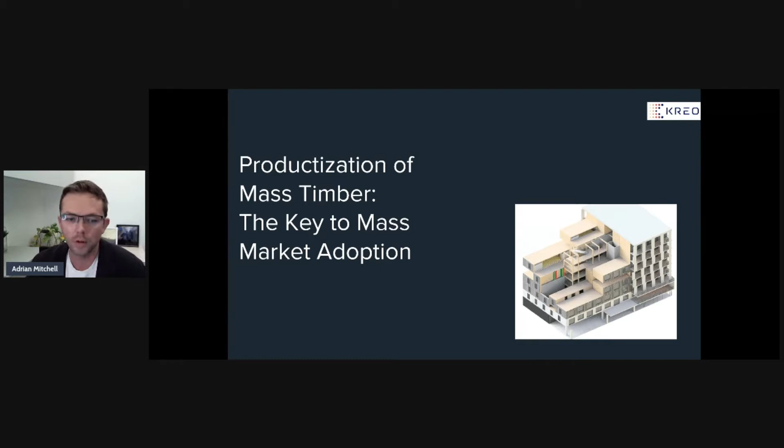So the question that I'd like to ask is, well, why haven't buildings become productized in general? We know that there are limited niche markets where we have seen substantial growth in productization, specifically the modular construction market or volumetric modular. But there's still a lot of ground to cover on the timber side of things. That being said, we're making progress.

One thing we can look at outside the construction industry is the productization that we've achieved in various other sectors, including things like vehicles and airplanes and electronics. They're all designed on modular platforms with standardized components. The big exception here is that, of all these big ticket items that we trust and that are highly evolved, we're still taking a very simple and non-productized approach in the way we develop and design most of our buildings.

So in order to understand what I believe to be some of the root factors inhibiting productization, we should focus first, I think, on where construction projects start, and that's in design. So in order to address some of the significant factors impeding adoption of productization and off-site construction methods, let's take a high-level look at how the traditional construction development industry conceives projects.

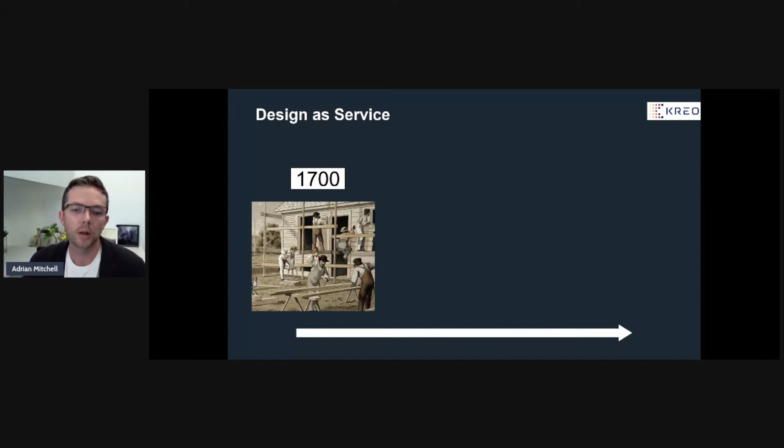So the design as a service model is a typical approach that the construction industry and development industry uses to develop a project. But it has not delivered the kind of innovation we've benefited from in other sectors. So it's true that we've seen a noteworthy uptick in prefab methods, but it still on average represents less than 10% of the market here in Canada and in the United States as well.

And despite substantial advantages to construction speed, quality control, and cost, the vast majority of construction is accomplished via traditional site-built framing or structural site-built methods. And this is especially true in the housing sector, where we're desperate for improvements in productivity.

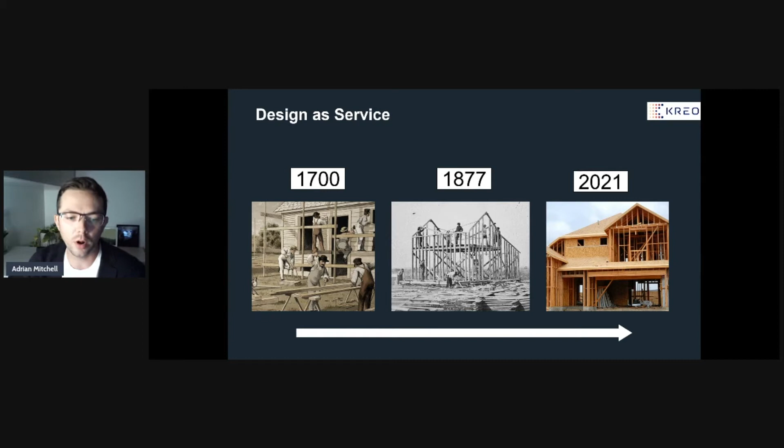So what's design as a product? So design as a product has unlocked the power of incremental improvement. As we can see outside of the construction industry, numerous generations of revolutionary improvement in this regard

have been applied to everything from automobiles, cell phones, computers, and it begs the question: what would design as a product look like if we'd applied it to architecture and construction and development in 1909, like Henry Ford did it to automobiles? What would our building systems and processes look like today if we'd evolved them over the last 150 years?

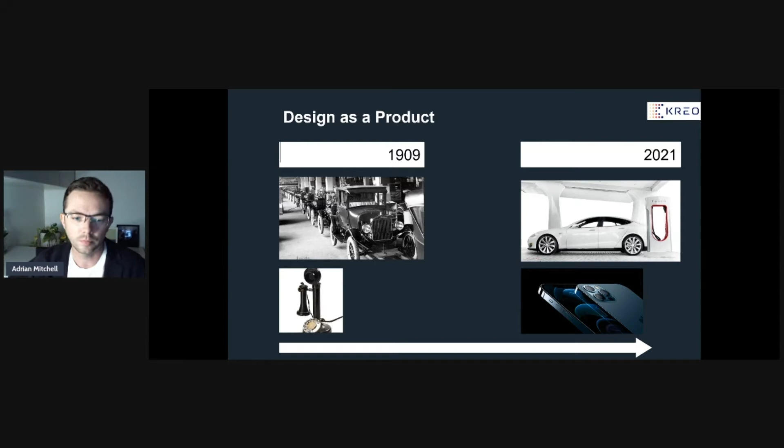So what I believe, based on my experience, is holding us back from mass adoption is the fact that we're treating too many projects as one-offs. And this revolves around the idea, I believe, of architecture and engineering as a service. So traditional conceptual design is about architecture as a one-off service. The opportunity for promoting mass adoption of modern construction methods starts at the product conceptual design stage.

It's really difficult to take an engineered system or kit of parts and apply it, after the fact, to a conceptual design that wasn't conceived around that kit of parts and its limitations and opportunities. So I believe the biggest opportunity here for us to advance productization and mass timber is really rooted in the way we conceive projects and treat them as one-offs. So architecture as a service generally follows three core steps.

And the problem is that traditional conceptual design leaves structural engineering too late in the process for productization to be effective. So what we want to do is consider engineering limitations in the kit of parts before we start conceiving our design or our massing and schematic. Because if we don't, we end up with a project that is more conducive to traditional methods.

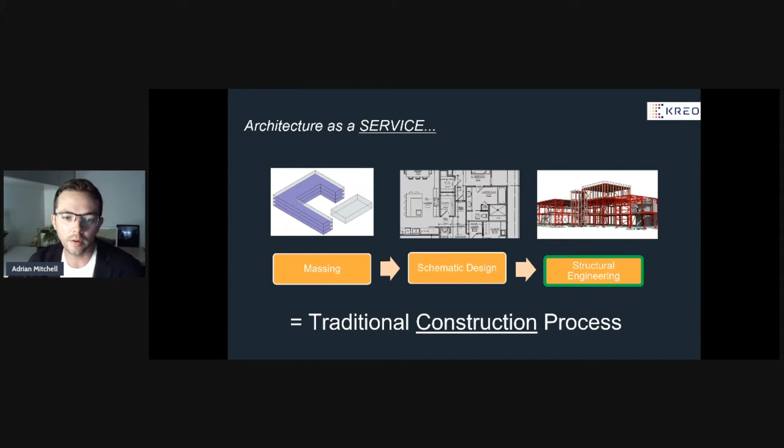And I lived this problem when I was doing prefabricated systems at both Bone Structure and Horizon North. All too often, I would have potential clients and developers coming to me with developed schematic designs, and they were already too far down the design path. They hadn't been designed with a kit of parts in mind, and we were tasked with an impossible process of trying to apply our system to a pre-designed scheme. And more than 99% of the time, those projects didn't move forward. So we need to take a look at how we conceive projects if we want to push forward.

So why is mass timber so compatible with productization? Because I think this is the key to the presentation: why, unlike traditional materials and methods, should mass timber embrace productization in order to achieve scale. So architecture and design as a product is about creating a versatile kit of parts and pre-engineered systems. And these systems should be versatile enough that they can be used on more than one project.

Does that mean these systems can't evolve and improve over time? No, but they should have enough flexibility that they can be used on a variety of projects for that building type. And the way we get there is the architect, working in advance with an engineer and manufacturing partner, develops a reusable library or kit of parts, which includes structural components, for example, mass timber, LVL or glulam beams, CLT panels for floors and shear walls and cores. And then once these components have been engineered, designed and thoughtfully put together, they can be used again on future projects, creating new efficiencies and also helping manufacturers create consistent and stable demand for materials.

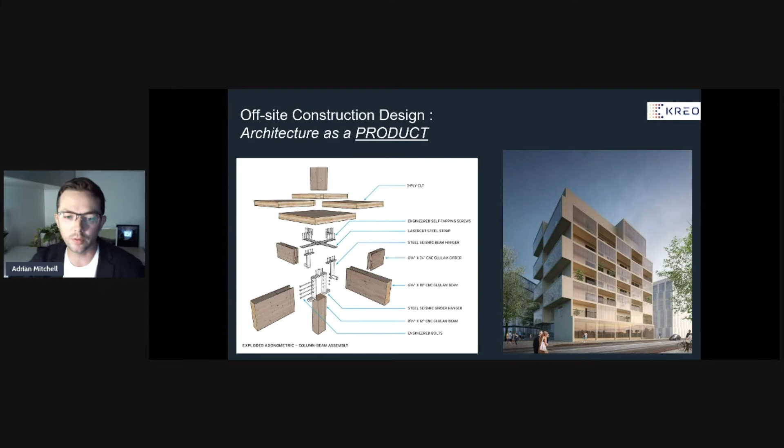So why is mass timber so ideal? Well, it's ideal because it's a highly value-added material versus stick lumber.

So this makes it ideal for productization, because if we use mass timber, we use these highly value-added materials with a traditional construction method, well, it's not very feasible. I mean, traditional methods have resulted in landfills being 50 to 60% full of construction waste. And if we're paying a lot more for our material, it's not feasible to have that kind of waste. So we're adding a lot of value.

We're preparing our material in the mass timber factories, to spec by the architects and the engineers. Those factories are producing those standard components, and instead of preparing and cutting those components on a job site and then installing them, we're really just focused on installing them on the job site, which has substantial impacts on speed of construction.

So also, we need to consider that mass timber is a highly value-added product that's produced in limited dimensions. So if we don't consider our supply chains, opportunities, limitations and strengths in the pre-con and in the conceptual design phase, we may be unknowingly, as architects and engineers, driving up costs unnecessarily by perhaps creating a one-bedroom apartment that's 6 inches too wide for the maximum size of a CLT panel, for example.

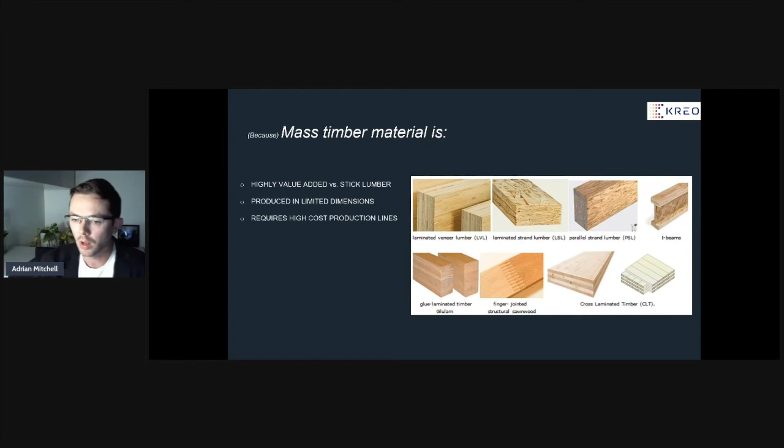So I'll move forward. So what does this look like? What does a workflow look like in architecture and design as a product versus architecture as a service and a one-off? Let's give you a sneak peek as to how we address this at Kreo software. But first, I'll share our vision at Kreo. What we believe here at Kreo is that we think differently about how the industry should conceive new projects. And this is because the status quo simply is not conducive to rapid adoption of productized building components like mass timber, modular, and offsite construction.

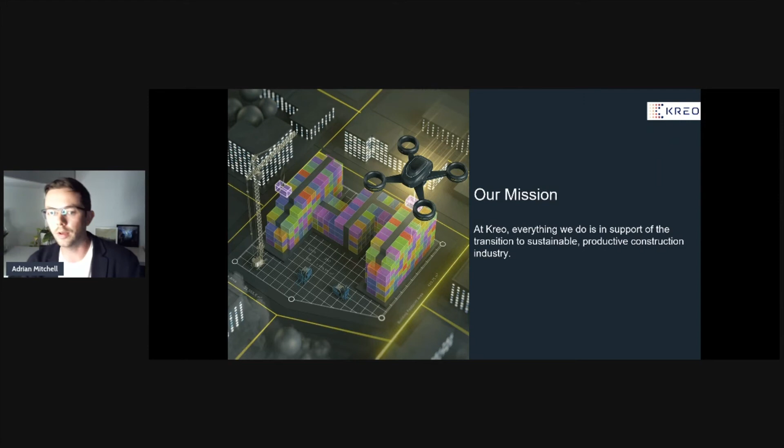So we believe that in order to achieve rapid adoption, we must address the way we design at the early stages, the conceptual design stages, and that the way we challenge the status quo is by making our design tools practical and easy to use. I, for example, am not an advanced BIM or Revit user, but surely you'll see how I can effectively conceptualize, at a pretty high level of detail, a mass timber project in a matter of minutes, and be able to test that project against other concepts or ideas that I might have, and get measurements using real BIM data against that result.

Before I jump into a quick workflow example and demo for you guys, I'll explain a little at a high level how we develop our system and how we articulate data. So on my screen here, you'll see a few things. When we work with a mass timber or modular client to embed their system and kit of parts onto our software platform, we start by breaking down their system by primary and secondary load members specifically.

So if it's a mass timber building, it may have columns that are glulam or LVL columns. It may have beams, glulam and LVL, and it may have CLT walls, CLT floors. And so that's what we can see here, breaking down the components.

And in doing that, we're taking a look at how those components can be used and what are the rules that need to be applied to those components so that we drop it into our AI-assisted design tool. We're not designing something that the engineers can't put their stamp on or can't approve. We're designing around the limitations of the system and each kit and each item in the kit of parts.

So we can see here that we're considering spans, we're considering loads, and we're also considering things like core configuration. And on this specific example, we were considering MEP and HVAC access to each floor back to the core. So every project is different. Kreo is not engineering and designing kit of parts. What Kreo does is we articulate productized systems like mass timber and modular.

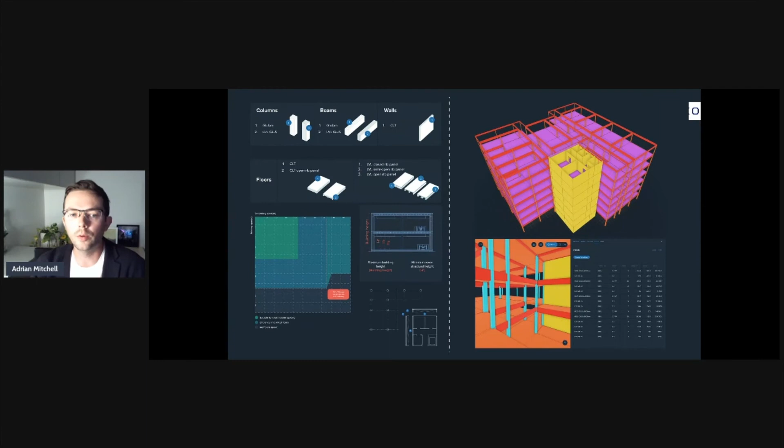So this is a quick window as to kind of the work we do with our clients in advance before a system is up and running on our platform. Essentially, we digitize kits of parts, and we take our clients' Revit or SolidWorks BIM objects, articulate those, and that can be for almost any building type. It could be for low-rise apartments, it could be for office buildings, it could be for student housing, anything that the architect, engineer, developer wants to use a kit of parts for.

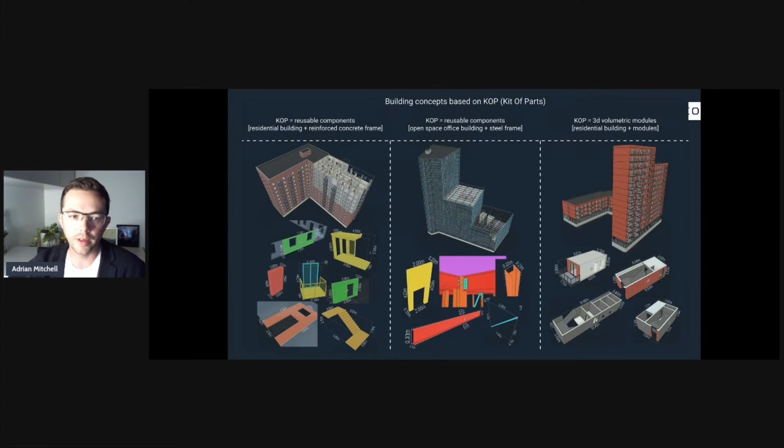We can articulate it and work with our clients to follow the rules around that kit of parts and make sure that they're expressed accurately on our platform. So the demonstration that I'll run through with you today is an example of a pilot project we did with a company called Stora Enso. Stora Enso is one of the largest producers of mass timber in the world, based in Europe.

And recently they observed some of the work we've been doing with an off-the-shelf product we have called Kreo Modular, which is a volumetric conceptual design tool. And they wanted to apply it to their mass timber kit of parts for office buildings specifically. So Kreo agreed to produce a proof of concept for them, and today I'd like to just give you an idea what that looks like.

Now, keep in mind, this is just a pilot project that we did. It's in process for potential future development, but it does give you a good understanding as to how Kreo can articulate productized mass timber kits of parts, and also what a workflow would look like for an architect, engineer, or developer trying to rapidly conceptualize productized systems. So I'll jump into that now.

So here we're on the dashboard for Kreo Design, and within Kreo Design, I've got the ability to access the Stora Enso pilot project. So I'll start by clicking the new project button. Call this the CanBIM project. And the project we'll be demonstrating today will be for a commercial office.

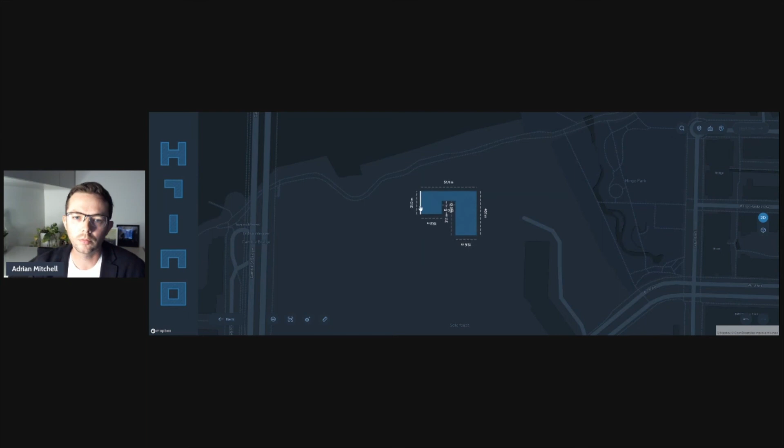Zoom in on it a bit, and I can reposition this on my site and maybe even change some of the dimensions for my building footprint. I want to make sure I maximize the nice view of False Creek as well as some of the south-facing natural light. So I've repositioned the massing here. Once I'm happy with that, I can proceed to the next step, and Kreo will begin to calculate potential solutions.

So the next phase is to choose the platform that represents what we think is the best circulation solution. What's interesting about the circulation solution here is it's also the HVAC and MEP solution. So we can see the light gray area is not only how people will access all sides of each floor of the office, but it's also where our MEP system is going to sit.

And this is important because the algorithm will actually design a structural solution that allows the MEP system to not be interfered by any structural components and provide direct access to the core. So generally what I try to do is I look at the one that has the optimal circulation area and the best, most direct path. And although this one has a low circulation area, I'm not too keen on the MEP complexity, so I'm going to choose this one.

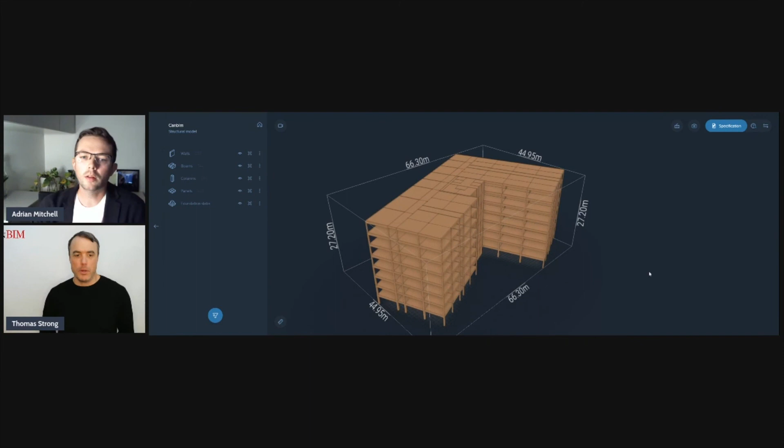So that's right. What do you think needs to be done to enable that in the market? Do we, as an industry, need to come together and agree on what that kit of parts should be? Or how do we even start this conversation with all the manufacturers and all the designers to say, hey, let's standardize on this? I guess there must have been some sort of similar movement when we decided on what a 2x4 was and a 2x6 was at some point, right?

Yeah, it's a great question. If I was a manufacturer, I would think there's a great opportunity for me to really take an initiative in that regard, and knowing the limitations and strengths of what I can produce better than anyone else, to really put a kit of parts together for the building types that we know there's a significant demand for, and really market that to the people designing these buildings, which are the architects, and feed them the ideal kit of parts that's going to drive down costs and increase production efficiencies without having too much of a detrimental effect on the architect's ability to do their job, right?

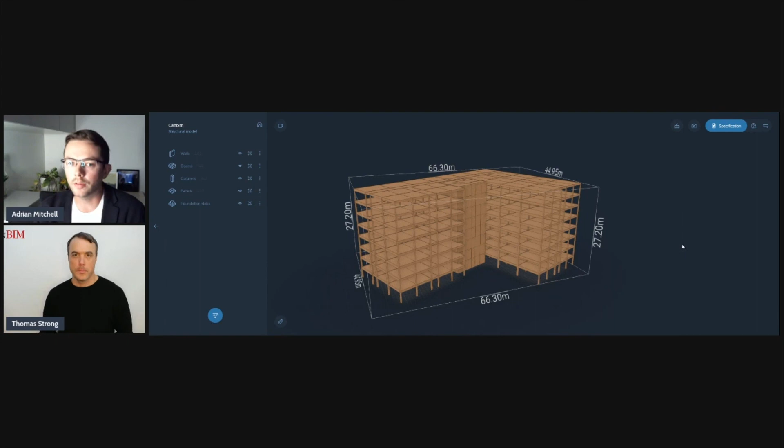Yeah. But if I was an architect, I would also see an opportunity to really carve out a competitive advantage in what is a highly competitive space, and diversify my pipeline of projects. And knowing that if I productize for a multifamily housing segment, and I do a good job, then I'm going to be able to drive a lot of future projects in my direction for people that want to use my productized system that I own. That's my IP, right? So it's hard for me to answer that straight, but I think it's a combination of architects and manufacturers taking a little bit more initiative in that regard.

Yeah, it's interesting. I think the shift is coming. We're already starting to see it, and I think it starts with those partnerships between the designers and the fabricators coming together and saying, how can we make something that's highly repetitive but can be adapted for various sites.